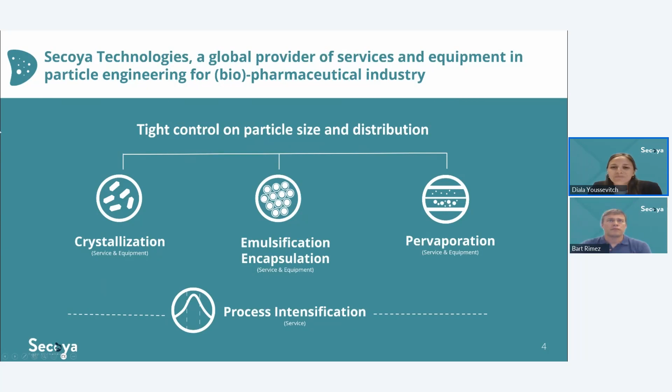Secoya Technologies has today four technology pillars. We have developed, over these past years, equipment and services in crystallization, which is today the focus of this webinar. We have also developed equipment in another technology, emulsification and encapsulation, to produce single or double emulsions with tight control on the size and distribution of particles. We also have a third technology in pervaporation, which is liquid-liquid separation through a dense and selective membrane. And a fourth technology pillar, process intensification, where we don't have equipment but rather expertise to help optimize your processes. I will let Bart take the lead and present our crystallization technology.

Thank you very much, Diala, for your kind introduction. I'm Bart Rimez, the developer of this crystallization technology.

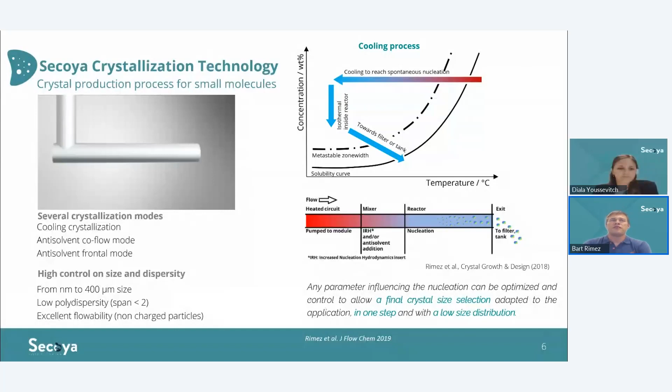As a short introduction for people not completely acquainted with the technology: Secoya Technologies focuses on spontaneous nucleation of a material in solution, with or without the addition of an anti-solvent, depicted on the left in the animation. Using our capillary reactors, the goal is to reach spontaneous nucleation conditions as fast as possible inside these reactors. Thanks to the very tight control of the temperature evolution of this material, you can determine the exact point where spontaneous nucleation will take place. The tight control of residence time and temperature inside the material means we can always produce material with very tight control of both particle size and particle size distribution.

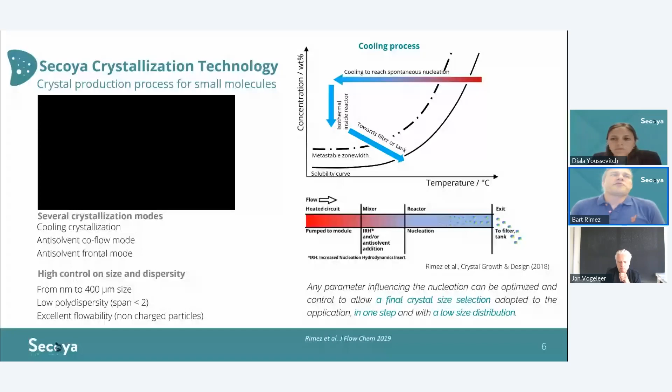We can do this for both cooling crystallization and with the anti-solvent in different modes, which I'll explain a bit later. For cooling crystallization, it's an ideal system for generating oral dosage forms, targeting larger particle sizes in the range of 50 to 100 micrometers, which tends to work well for compounds in BCS class 1 and 3. With anti-solvent modes, you can more easily target smaller particle sizes, and also work with more difficultly soluble materials in vivo, as we have found.

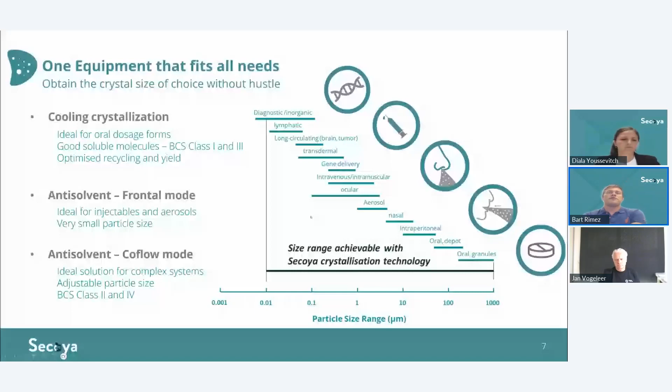Basically, our technology facilitates the use of any material in solution, and that up to 85 degrees C, as we see that as a useful temperature limit of many molecules in solution before they start to disintegrate, but also many organic solvents are not useful at temperatures above 85 degrees C.

The anti-solvent side is typically also allowed to be administered heated or cooled, and that's really important for polymorphic control of the system. The reactor, where crystallization and nucleation take place, can be changed within a decent temperature range of anything between 0 to 70 degrees C, which we found most useful.

These things come with different inserts and reactors, and I will explain a little bit more in detail why this selection needs to be done and how it's done. Most importantly, the moment you have selected the correct insert and reactor on the laboratory gram-scale instrument with your first parameterization of the system, you then keep that combination of insert and reactor, with all the temperatures and flow rates, constant up to pilot scale, where you do kilogram testing of the recipe you generated at lab scale, to finally outscale to the SCT-ICE instrument, again with exactly the same insert and reactor combination.

I leave this to Diala.

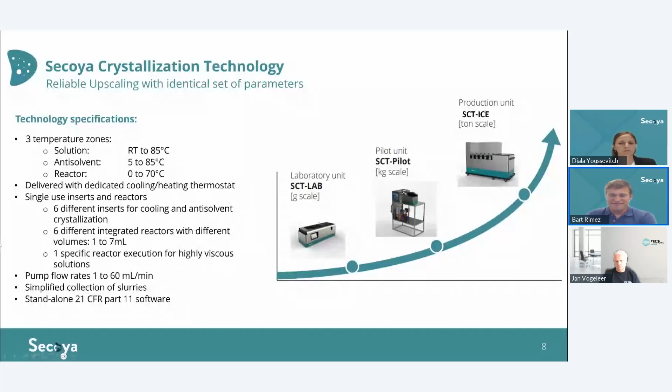Okay, thank you, Diala. Now let's get into a bit more of the details of the technology and how exactly we attack crystallization inside of our reactors.

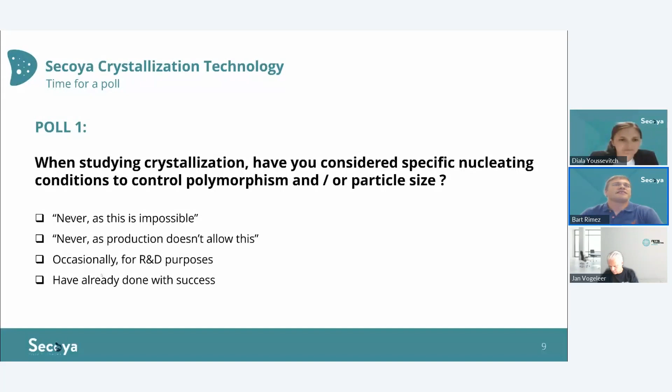Those are the ones that are nucleated at these temperatures. The residence time inside the reactor is then used to conduct the complete nucleation of the system, and at the outlet of the system, in this case, we needed to heat up the system to grow to its equilibrium point, since we needed to pass the enantiotropic point there, above 20 degrees Celsius.

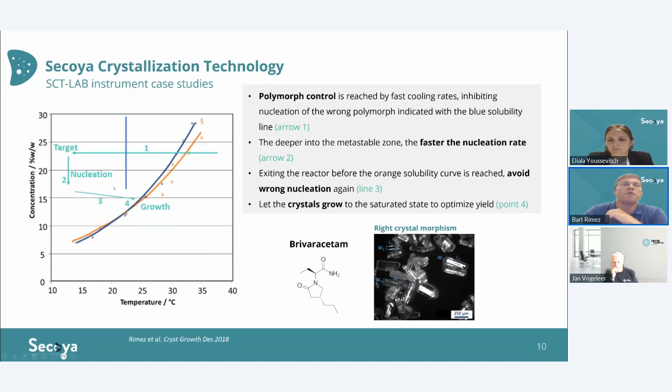In this case, we are able to have polymorphic control of the particles, and then using hydrodynamics, we're also able to steer the particle size in the end. That's one of the main benefits of using Secoya crystallization technology: we regard the phase diagram as a two-dimensional issue that we first solve for any new molecule.

But then we are really able to play around with the third axis, the hydrodynamic axis, which really enables us to further increase and play around with the overall nucleation rate, meaning that optimizing this nucleation rate can directly generate the particle size of the product you want to obtain.

Just to give you some clear examples on that for both cooling crystallization and antisolvent crystallization: we have done some work in the past on glycine in water, where we determined a certain concentration, a certain nucleation temperature, and kept that constant throughout this complete series of tests.

In this series of tests, we kept the thermodynamic conditions exactly the same - temperature evolution, residence time, and all of that. The only changes applied were a change in both flow rate and inner diameter of the reactor, together with the length of the reactor, generating always exactly the same residence time, but enabling a linear increase in shear rate from 284 per second up to 12,000 per second, as well as a huge evolution in the Reynolds number inside the reactors.

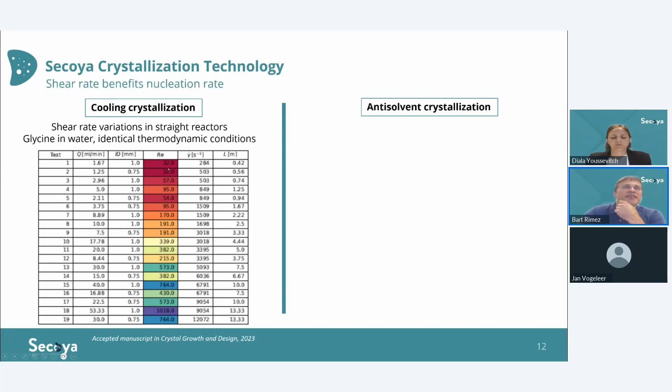And what you see, at the same thermodynamic conditions, and that's quite surprising, is that your nucleation rate J goes through a maximum here, J max, which is then the normalization factor for the complete curve.

When you further increase the shear rate, you start to decrease the nucleation rate again. For glycine in water, at a shear rate of about 200, you go through a maximum point. It's important to notice this is 5-fold higher than a slightly lower shear rate. So your nucleation rate is hugely impacted by these localized shear rates inside the tubing, and therefore a major part of our work is determining the optimum shear rate conditions for your molecule to nucleate.

On the other hand, for antisolvent crystallization, I'll briefly discuss what happens inside a T-mixer. You inject your heated solution from the left, and from the other end you inject your antisolvent at a certain flow rate and velocity. Inside, you generate tiny domains, vortical eddies, that determine how you mix the solution and antisolvent. You retrieve micro-mixing domains, known in physics as the Kolmogorov and Batchelor scale, where tiny zones exist in which antisolvent is in direct contact with solvent.

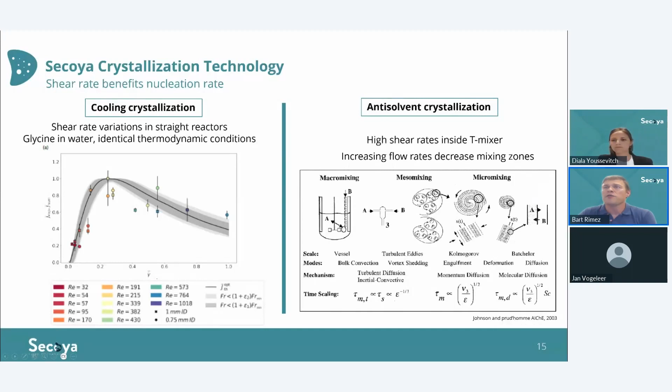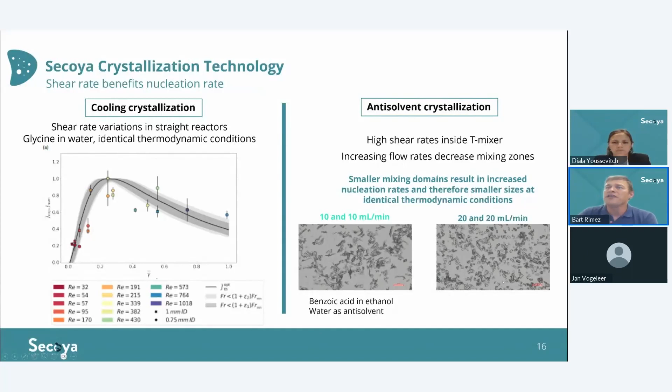You obtain rather good crystallization with some elongated crystalline rods. Then simply by increasing the flow rate 2 times for both solution and antisolvent, you see a huge impact on particle size, but also on the aspect ratio between length and width of the crystals. Just by multiplying the flow rates, you increase the nucleation rate by a factor of 2 or basically 3.

So for all cases studied up to now, we are always able to first look for the ideal thermodynamic condition for your system to start nucleating. Then by using different approaches, this famous third axis of hydrodynamics, we can play with the overall nucleation rate to better steer the eventual particle size you want to obtain in the end.

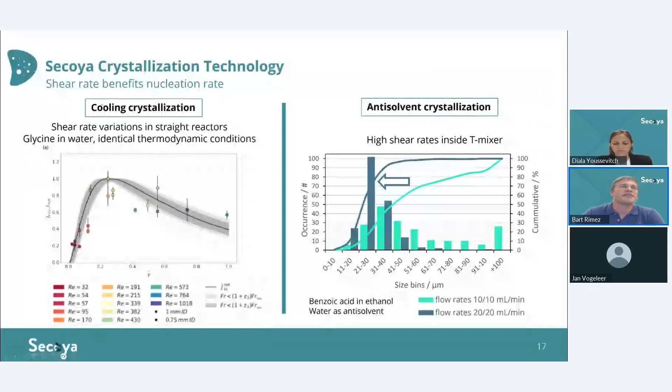All of this was already demonstrated on BCS class 1, 2, and 3 molecules, steering the particle size of the system. But we've also done salt crystallizations, reactive crystallizations, and even amorphous precipitations down to the nanometer scale. Also, the benefit of our system is that on one single device, you can have different administration pathways possible by simply changing some parameters inside the test.

As a plain example, we published a study on crystallization of aspirin in acetic anhydride, using exactly the same concentrations, flow rates, and reactor length. The only thing altered was the nucleation temperature, stepwise decreased by 5 degrees Celsius per step. Simply by changing this temperature, you can select production of 22 micrometer particle size aspirin, or 70, or even 3 microns, depending on the application.

So that's a true benefit of this unit: by varying several parameters, you can generate a vast window of different powders using our system.

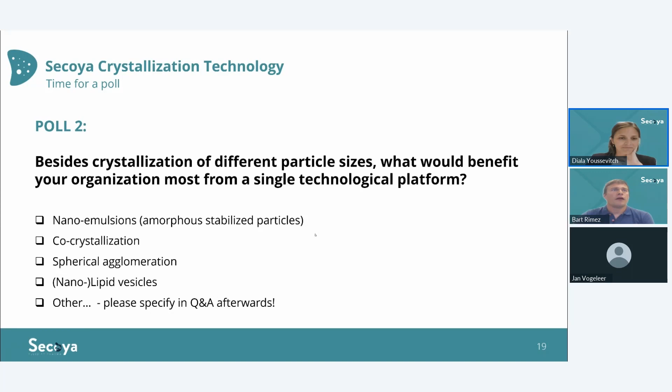Okay, now we can dive a little bit more into the process development of the system. You will start out working with the SCT-Lab instrument, which is the laboratory unit enabling batch-wise tests at the gram scale using a set combination of insert and reactor.

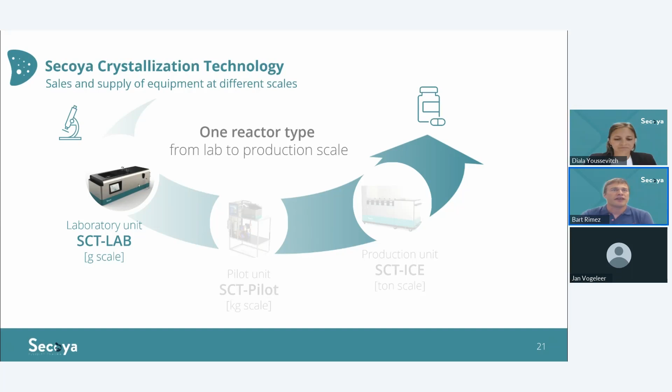For example, with adipic acid, we selected a cooling zero insert, meaning we don't play around with hydrodynamics in this case, and a 3 milliliter reactor, as a good starting point to conduct the crystallization. We applied a solution temperature of 60 degrees Celsius with a solution concentration of 60 milligrams per milliliter, and a flow rate of 30 ml per minute.

We saw that nucleating at 15 degrees C gave too fast blockages of the system, whereas this was not achieved at 17.5. So we did not regard 15 degrees Celsius as a valid starting point.

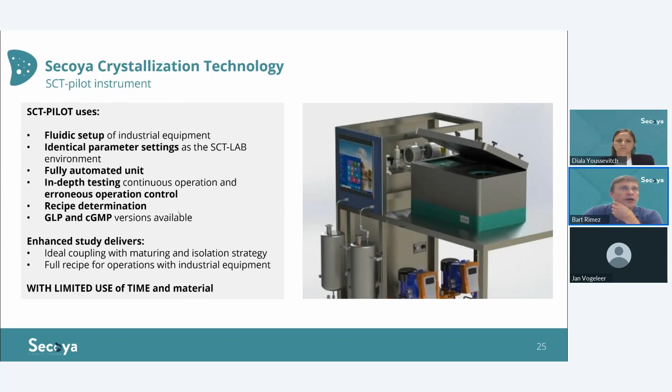Using this unit, we prepared an 8-liter solution of adipic acid so that we would be able to conduct a test of about 4 hours, fully testing the unit with exactly the same recipe, keeping everything constant. At different times we took a sampling of several minutes of product, waited 2 minutes, which is why we applied filtration in these 2-minute increments.

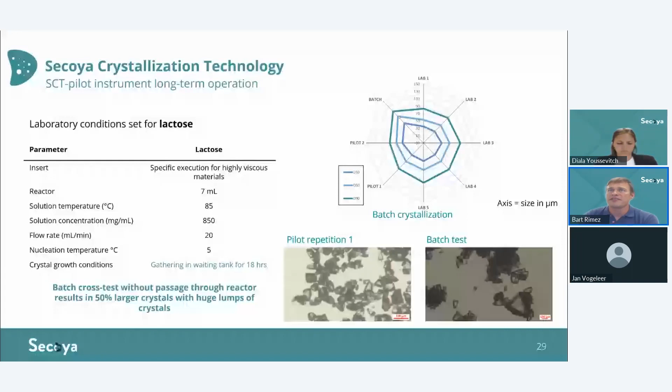You still have crystallization events occurring when you don't pass through the reactor, but you directly see these big lumps occurring, a wider distribution, and most importantly, a 50% increase in particle size with respect to the pilot tests we conducted. So that's an important fact.

Of course, once you've conducted these recipes at pilot scale, you've also done your boundary batch tests to see which conditions and boundaries can be set. You're then able to increase your scale to the industrial crystallization equipment, or SCT-ICE.

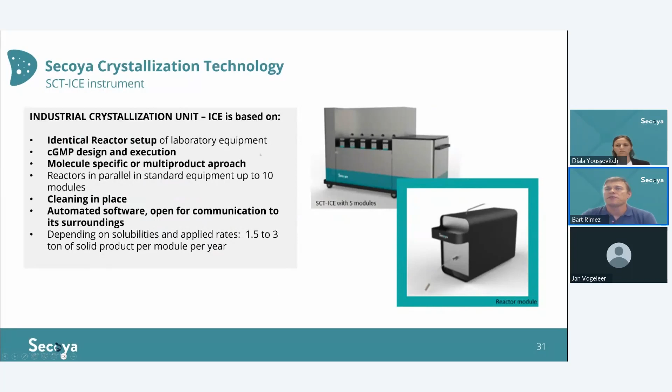The ICE unit is based on an identical reactor setup to your laboratory equipment. In this example shown in this picture, we have multiplied the amount of reactors by 5, but the current demonstration system sitting here in our building in Louvain-la-Neuve in Belgium can accommodate up to 10 of these reactors in a second table on top.

We have created a molecule-specific, or multi-product, approach, meaning you would be able to exchange these modules to be accommodated for a different molecule. But that's really something that needs to be negotiated together with the client.

It has automated software with an open communication platform to its surroundings, to be introduced into your networks, so it has the possibility to fully communicate with systems prior to our unit, but also maybe to any filtration unit that comes behind in the production scheme.

Now, in our quality by design approach of our unit, it's really important, since the reactors do not change between laboratory and industrial scale, to have as stable as possible nucleation temperature, which is depicted here on the ice running after the startup of the system, to have a stable temperature which does not vary anymore, which is hugely important.

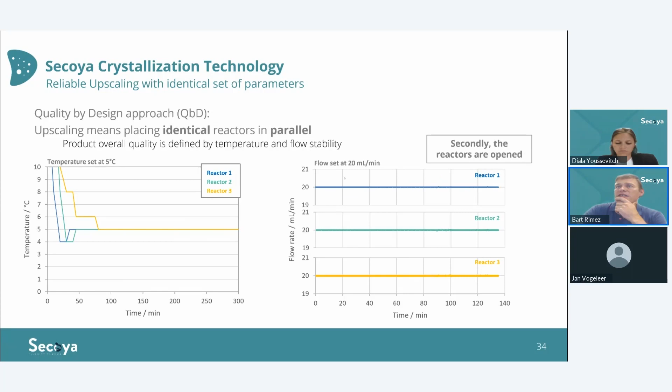We have generated an algorithm that opens automatically the modules whenever all temperatures are confirmed as being stable, meaning that you would then open reactor 1, 2, and 3 consecutively. This also depicts the stability of the flow rates achieved inside of these reactors, which is hugely important.

We do have a real-time parameter control to enable fast adjustments of the flow whenever necessary. We are able to generate such a stable flow that it only has a 0.3% deviation of the initial value you have set. Meaning that whenever you have a boundary condition, in this case 19 and 21 milliliters per minute, where you see your product quality starting to go down, you know you will always be inside of this zone.

That's also programmed inside of our unit. So let's say that for this case, the parameter we set for the flow rate needs to be between the boundaries of 19.95 and 20.05. We know that under normal operation, you do not have variations outside of these boundaries. But we did the tests on the pilot scale, and we know that below 19 and above 21 milliliters per minute, you do have a deterioration of your product quality.

So it means that whenever there would be some kind of hysteresis or deviation in the flow rate that does not reach this boundary condition, there will only be a soft alarm generated, and your flow regulators will automatically adjust this whenever possible. You'll go back to the normal flow rate, and there will not be a trip event of the system because your product quality is not affected.

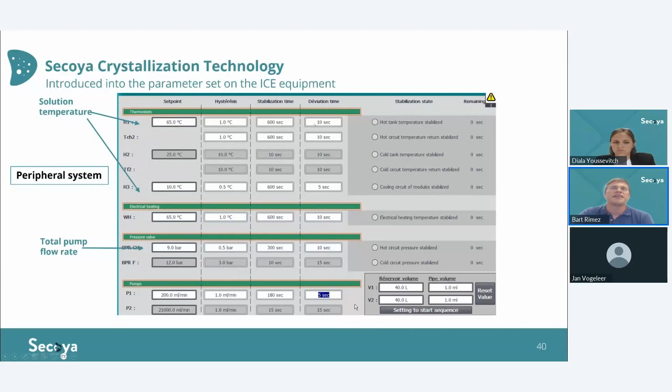You can do the same programming for every module. You can copy these set points for all modules, but you can also select different modules having different flow rates, or temperatures—that's something we can accommodate. And you have the same kind of programming there.

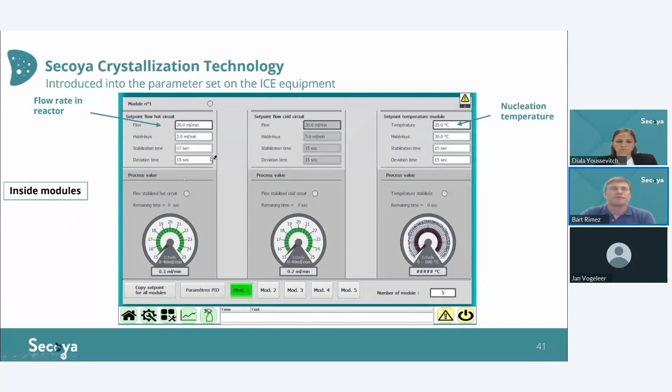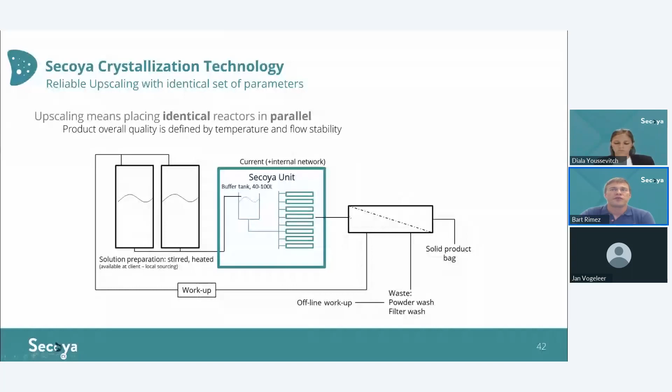At the outlet, your products are gathered, and then there's always the choice of either letting the slurries grow inside of waiting tanks at a certain temperature to reach equilibrium state, or, in the other example of adipic acid, only having to wait inside of these filters for 2 minutes before doing the full filtration of the system. So to give you more insight into how we do this, I will show some anonymized production strategies we have developed together with customers already, because that's getting more pertinent.

In this case, the customer wanted to have a 25 kilogram production per day of a compound which was in BCS class 2. It's also considered as a potent compound. And they wanted to produce 100 kilogram per week of this compound.

We could do some tests only during the day, but they have a 2-shift basis in working hours of their operators, meaning that we would have a window more or less per day of 12-hour production, in which we needed to do the setup, the production, and the cleaning in place of the system.

By calculating everything, we came up with a possible solution, taking all solubilities, the yields, and whatever point that we have been discovering on the pilot scale unit with a 30 milliliter per minute that we could achieve as well. And that we have here in the end a 350 gram per hour per reactor of productivity, meaning that to obtain this production rate, we need to apply 8 reactors that can be produced during 9 hours, a total of 25.2 kilograms.

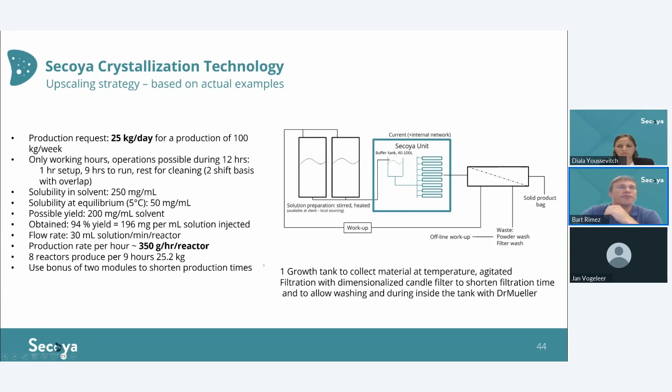Another example, and this is the lactose example. Our customer there wants to produce 50 tons per year, split in weekly productions, meaning that we have to produce from Monday to Friday, but from Monday to Friday also including the cleaning in place of the system, but also to conduct this very long 18-hour growth time necessary for the last portion of the produced slurries.

And therefore we selected 3 growth tanks to be filled during the week, meaning that during this 5-day work week, we apply 3 full days of nucleating inside of our reactor on the conditions that are set there. We can produce almost 800 grams per hour per reactor in this instance.

That's possible, of course, thanks to the high solubility of lactose in the system. And then we can, which we consider the limit of our unit, with using 50 reactors, we can produce per 3 days nearly 3 tons of product, meaning that with 17 of these repeated batches per year, we are able to both accommodate the full production of 50 tons, which gives us a lot of spare time for every event that may occur, but also to open the space whenever the production needs to be increased.

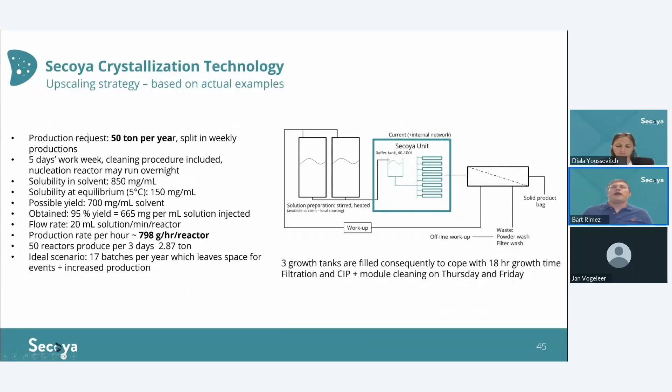And then a third example that might be considered as a bit of a specific example, but because in this case, it's a reactive crystallization of an inorganic salt. And this inorganic salt is very specific because it doesn't require a reactor to be used. In fact, it's only the quality of mixing in this case that determines the product quality, like I shown you before with this example of benzoic acid.

In this case, we're able to increase the overall flow rates up to 200 milliliters per minute for the solution side and to 1000 milliliters per minute for the anti-solvent side, because we need this 1:5 mixing ratio, again, to be polymorph selective in this case as well. With lower quantities of anti-solvent, we do obtain the wrong polymorphic form in this case.

And for this customer, we label with 4 of those reactor, in fact, nozzles that are implemented directly inside of the Nutsche cell here, that we can inject with these 4 nozzles and obtain a production of 5 kilograms of solid products per hour.

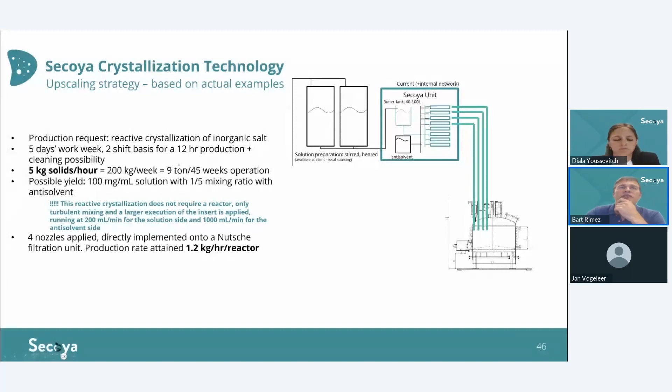This for them is in fact a pilot scale unit, and we will then increase with them multiplying the amount of nozzles that are generated here on the hood. We can then still increase drastically the production rate per hour, which ends up with the next poll, Diala.

Diala, you're in mute. Sorry for that. Thank you, Bart.

So our last poll is, and our last question is, how would you consider the implementation of this technology at your company? Would you be interested to have a full in-house development and production cycle, which means going from the lab equipment to the pilot and the industrial unit at your premises?

Or would you go for first feasibility studies done by Secoya in our premises, then implement also the lab, the pilot, and the industrial unit? Or would you go either to a feasibility studies and a full process development at the lab scale at Secoya, then implement the pilot and the industrial scale? Or would you rather go for a process development made by Secoya, which is the lab and the pilot unit that we would do for you, and then implement the industrial scale at your premises?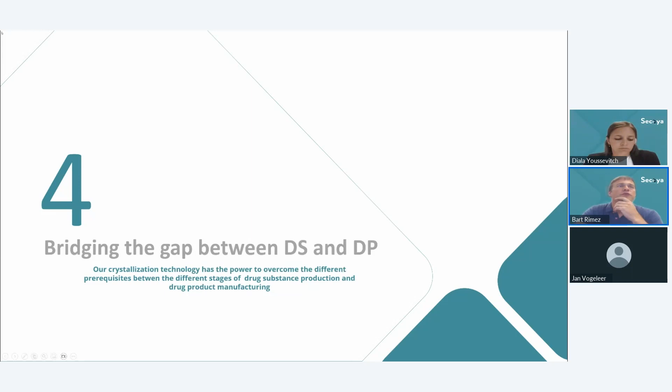Now, of course, we can produce these nice powders with good particle size control and particle size distribution, but we also regard our technology as an enabler technology to overcome the different prerequisites between drug substance production and drug product manufacturing. If you look at the drug substance synthesis, we can control polymorphism and size, but for the real drug product application, you also need control of density, flowability, and compactability for both dry or wet granulation.

But we truly see our unit being able to bridge the gap between DS and DP, thanks to the fact that we can do control and have a very uniform output of material, having always the same density and flowability, having less issues, for example, with electrostaticity, and generally increasing the feederability of the product.

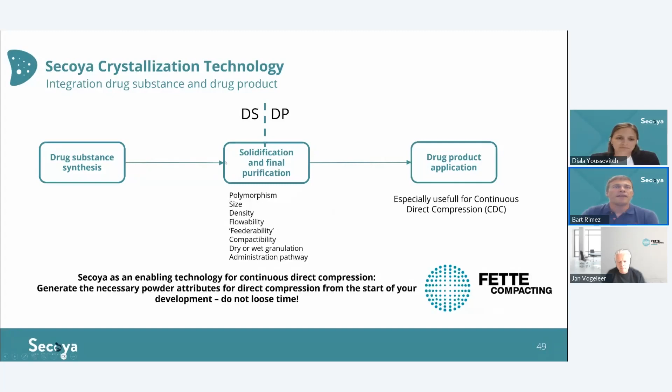And therefore, we're really happy to announce that we will work together with the Fette Compacting Group. That allows me to introduce Jan Vogeleer, Director of Global Product Management and Strategic Business Development at Fette Compacting, to introduce their continuous manufacturing equipment and to discuss briefly how we can integrate our Secoya crystallization technology with their continuous manufacturing equipment. Jan, the floor is yours.

Okay, hey, do you hear me? Yeah, okay good. Diala and Bart, thank you very much for inviting me to this interesting webinar.

I was already introduced. My name is Jan Vogeleer. I am based at the Fette Compacting Belgium office, which is an entity we created back in 2017 in Belgium, in Mechelen, between Brussels and Antwerp. Fette Compacting Belgium is not a sales and service subsidiary, we are in fact a development and launch entity within the Vette Compacting Group.

Fette Compacting, for those who are not familiar with us, is a company based just outside Hamburg. We develop and sell worldwide rotary tablet presses and, since shortly, also capsule fillers. We can say we are market leader in industrial tablet production based on this concept of rotary tablet presses. Some years ago, we decided, in the interest of expanding the activities of the Fette Compacting Group, to step also into continuous manufacturing. We are active in the area of drug product production, where since 15 years there is a strong interest and a bit of a slower trend towards continuous manufacturing.

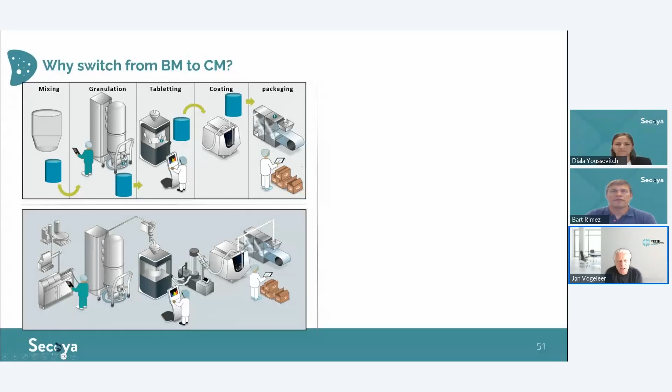Our industry is a batch manufacturing environment, and for obvious reasons we want to move to continuous manufacturing. Now, what the link is with a company like Secoya, I would like to explain in a few minutes. So, if we can go to the second slide please... So why does our industry, the drug product manufacturing industry, why is there this interest to move from batch manufacturing to continuous manufacturing? Well, there are 5 main reasons, which are listed here.

The two obvious ones are: when we interconnect all those different unit operations, as we call it - dispensing, mixing, granulation, tableting, coating, packaging - if you combine all those unit operations into one long chain of subsequent units, we have, of course, some obvious savings like reduced capex. The whole system becomes smaller, more compact, and therefore also reduced cost. You need less space to install it, which is also a big saving in manufacturing area. And of course, you don't have all the intermediate product stock - this work in progress is significantly reduced. So that's the reduced capex and opex.

An important cost-saving element is the fact that there is no need anymore for intermediate quality control between the different process steps. But what is much more important is points 3, 4, and 5. Point 3 is more efficient production. The size of a batch in our industry now is determined by the size of the machine. If you have a batch coater, a batch fluid bed, or a batch granulator, the size of the machine determines the batch size - tablet press is the exception there. Now, when going to continuous manufacturing, the batch size is not determined by the physical dimensions of a machine anymore, but by runtime, which gives a lot of flexibility in terms of how big a batch I can produce.

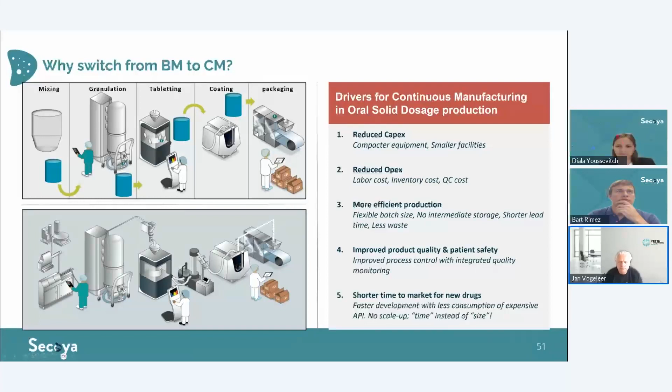As I mentioned before, around 2005 there were the first pharmaceutical companies and equipment suppliers who stepped into the development of continuous manufacturing technology. The initial focus was on continuous high shear granulation and drying.

As a matter of fact, Professor Remon at the University of Ghent developed, between 2000 and 2005, the twin screw wet granulation system, which was then adopted by GEA and turned into a commercial product.

Now, the thing is that we are now 20 years later, and only about 20 drugs are being produced in a continuous way by less than five, or more or less five, companies. So continuous manufacturing is really not taking off very much.

The reason for this is, in fact, three points. The equipment - well, there was a big focus on continuous high shear granulation and drying. That was the main focus by those early movers. And why? Because in the batch world, about 80% of all drug products are based on a wet granulation and drying process.

Now, when switching to or developing this continuous manufacturing technology, there was big focus on developing a continuous granulation and drying technology. This made equipment very complex and therefore very expensive.

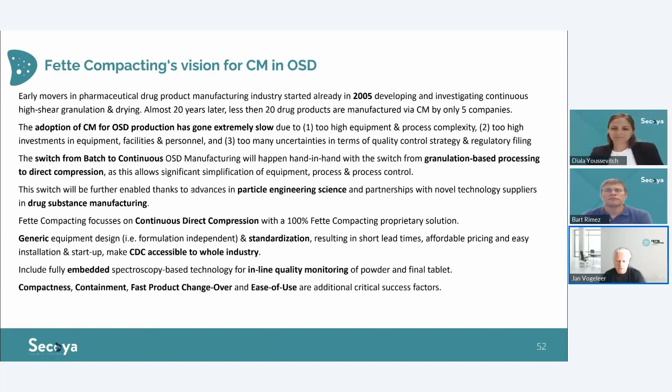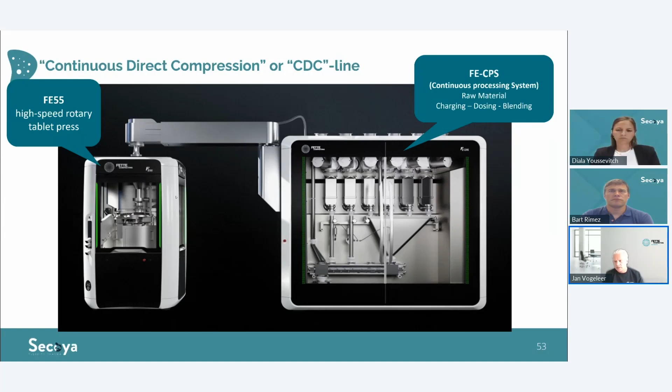Here you see the main components of this system. On top there are 6 material inlets, typically API, a filler, binder, a disintegrant, and in nearly all cases a lubricant.

Why do we have 6 material inlets? A study has shown that 85% of all tablet formulations have 6 or less components. There are, of course, tablets with more than 6 ingredients, but in that case we typically work with what we call a premix, where multiple minor ingredients are pre-blended into one bin prior to bringing to the line.

Up to 6 material inlets, we have automatic refill systems, which are important to dose how the raw materials are fed into the machine. Below that are 6 loss-in-weight feeders, very accurate, precise devices that dose each of those 6 ingredients at a very accurate feed rate, expressed as kilograms or grams per hour, into the blender.

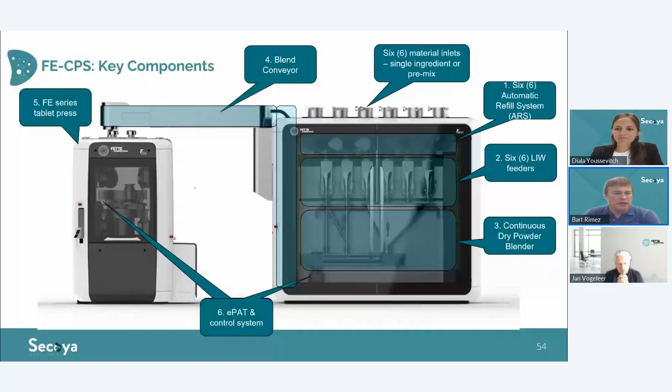So, Jan, if I may interrupt, because I think we're almost running out of time. We will also send everybody a link to this nice animation on how this beautiful equipment runs. But what is very important here is also to say that we are looking for actual case studies where we have linked to the industry.

So really the provision of powder that can be both treated with our crystallization technology and can be directly measured with all the different parameters necessary to be introduced inside of the Fette Compacting, the continuous manufacturing compacting machine.

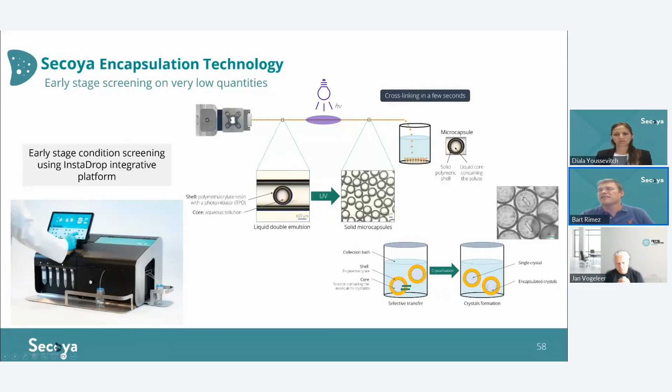We're running out of time, but I have to tell you one more thing we've been developing. There were big questions regarding the total amount of product that can be used during the laboratory screening phase. That's why we developed the InstaDrop unit, which enables full screening of your material regarding polymorphism and interaction with different solvents, by encapsulating small amounts of material inside a polymethacrylate resin that is hardened using UV light, upon which you can do exchanges with other liquids to generate, for example, single crystals inside encapsulated materials.

We've already done a huge range of different materials crystallized, including copper sulfate, sodium chloride, but also proteins and different organic systems. The main advantage is that per test you produce several thousand capsules per minute, using only 50 micrograms of your very precious solute material in the early stage of the system.

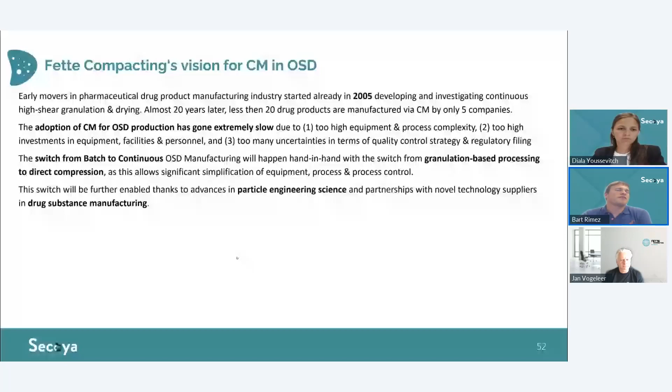Once that's done, we look into the hydrodynamics of the system whenever the required particle size and distribution isn't met yet. Then we optimize hydrodynamics to reach, at equilibrium state, exactly the particle size you need. That's the determination of the recipe, which is then later translated to the pilot unit.

Thank you, maybe one more question, Diala. Yes, one more question: how to implement your technology for the regulatory bodies?

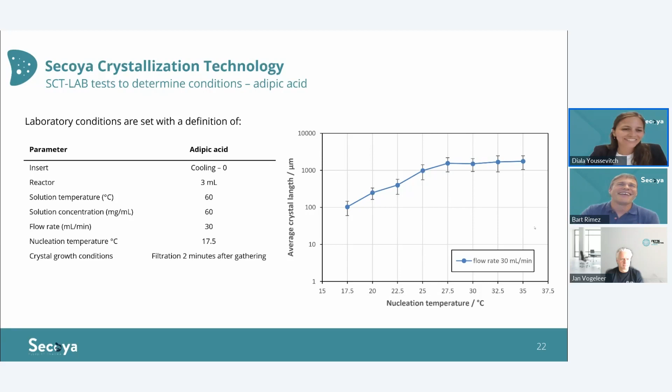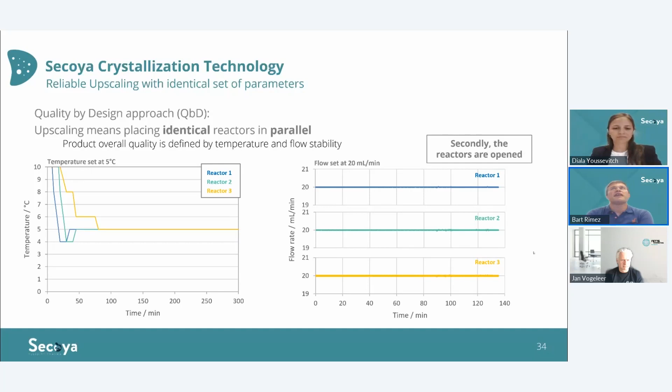Yes, indeed. We're already in discussion with many partners in the pharmaceutical industry. Of course, we cannot go directly without any readily available material to the FDA and say, this is our equipment, just have a look at it and tell us if it's good or not. So what we tried to do is generate a system by working only with people who are very experienced in the field, who can program for us GMP regulated software, and to use only the right kind of materials, hardware, and software.

So everything regarding that is already, let's say, at level. But we do help customers with setting up the dossier for the clinical phases you need to go through. For example, clinical phase 1 and sometimes phase 2, you can solve a lot with producing small batches on the SCT lab equipment. The moment you need to increase your total amount of product, you need to scale up the system to the pilot unit.

With the pilot unit, we help you with setting up the complete dossier, with determination of the boundary conditions of several parameters to showcase the robustness of the production we're organizing, to describe completely the process, how it should be done, to enable you later on, without changing the dossier anymore, to multiply the amount of reactors you produce.

So we do help a lot of pharmaceutical companies already with this transition. We know that at some point we will be able to install and do a full commercial production with the customer in due time.

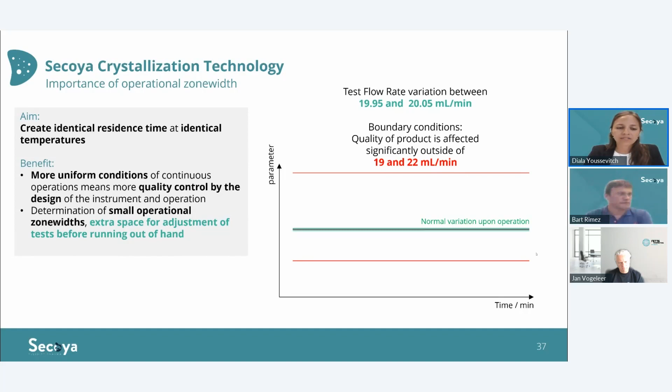Yes, so PAT can be introduced when, for example, we use a waiting tank and you need to let your crystals grow to a certain equilibrium temperature. There we will be using the size probes from Mettler that exist, and there you can monitor and control the evolution of particle size and then go for filtration afterwards.

Product that comes readily out of the reactor goes so fast and is so tiny that directly implementing PAT on our reactors is impossible. So whenever there is, and then I can directly respond also with the continuous filtration unit.

We work together with different partners in the field who themselves have PAT included inside their continuous filtration units. So whenever the product slurry comes out of our reactor, and it does take some seconds to reach equilibrium stage, which is mostly the case for lowly soluble materials, then the direct isolation and size analysis can be done directly and can be coupled back if necessary.

But usually, because we have this quality by design approach, at the moment we don't see any deviations inside the flow rates and temperature of the unit, we know the product quality is guaranteed. So for the moment, we did not implement yet any feedback loops coming from the particle size analysis back to our reactors, in all honesty.